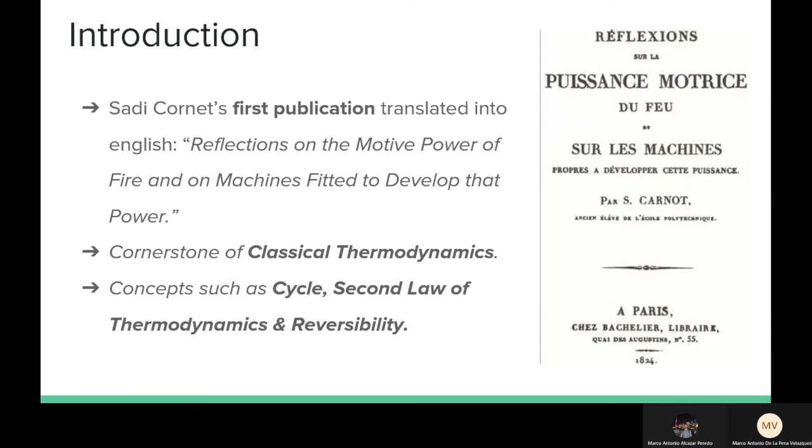Some concepts that are important to know before we start are the Clausius statement, which states that it is impossible to construct a device which operates on a cycle and produces no other effect than the transfer of heat from a cooler body to a hotter body. The Kelvin-Planck statement says that it is impossible to construct a device which operates on a cycle and produces no other effect than the transfer of heat from a single body in order to produce work.

The motive power is an agent that does work in a process; most commonly it is water, steam, or electricity. The main purpose of this paper is to answer the question of whether the motive power of heat, or the efficiency in steam engines, is unbounded or has assignable limits which nature will not allow to pass. So, it is worth mentioning that all substances on our planet are susceptible to changes in volume, pressure, temperature, and this leads to changes in the state of matter.

Now, let's talk about the natural flow of heat. Carnot states that the heat goes from a hot body to a cold body. It cannot be the other way around because it would violate the second law of thermodynamics. And we can also say that according to Carnot, wherever there exists a difference in temperature, motive power can be produced.

So go ahead, please.

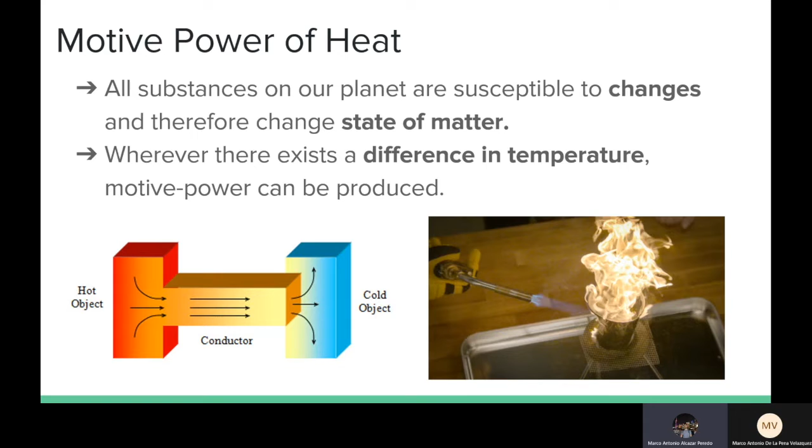Okay, so now let's make a mental experiment. Carnot in his paper says that we should imagine two bodies: body A with a hot temperature and body B with a cold one. We put them in contact, and then we can assure that it's impossible to return to body A the heat employed to raise the temperature of the liquid. But the inverse process, that is to give heat to body A, is permitted. This means that when we put these two bodies into contact, they will reach a thermal equilibrium, and we cannot return to body A the heat employed to raise the temperature of body B.

So go ahead, please. Carnot also mentions two very important theorems. The first theorem is about volume and pressure, on the right side of the slide, and it says: when a gas passes without change of temperature from one definite volume and pressure to another volume and another pressure equally definite, the quantity of caloric or heat absorbed or relinquished is always the same, whatever may be the nature of the gas chosen as subject of the experiment.

I'll give you an example so you can have it more clear. Imagine that you have 1 liter of air at a temperature of 100 degrees Celsius, and a certain amount of heat must be supplied to it. Now we can assure that this quantity of heat will be exactly the same if instead of operating on air, we operate upon nitrogen, hydrogen, carbonic acid gas, alcohol, neon, helium, argon, etc.

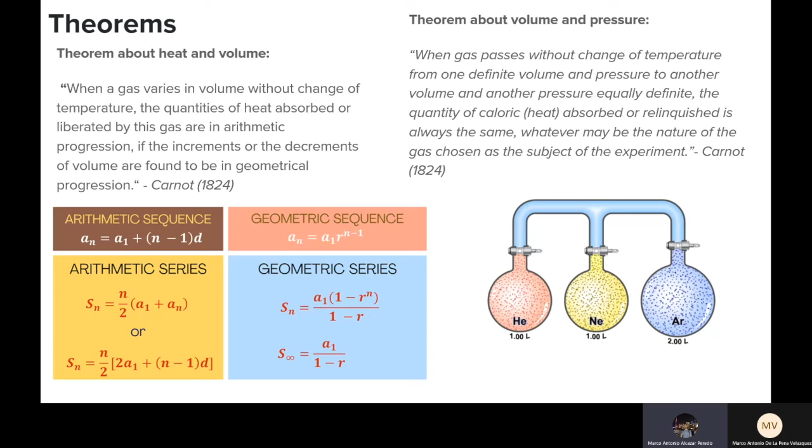Carnot also talks about the conditions to create the most efficient engine. The first condition is that the temperature of the fluid must be as high as possible, so we can obtain a great flow of heat and in consequence a large production of motive power. A second option is that instead of heating the fluid, we must cool down the reservoir as far as we can, and we will obtain the same result. And the third proposition of Carnot is that it should be arranged that the passage of an elastic fluid from the highest to the lowest temperature should be due to an increment in volume.

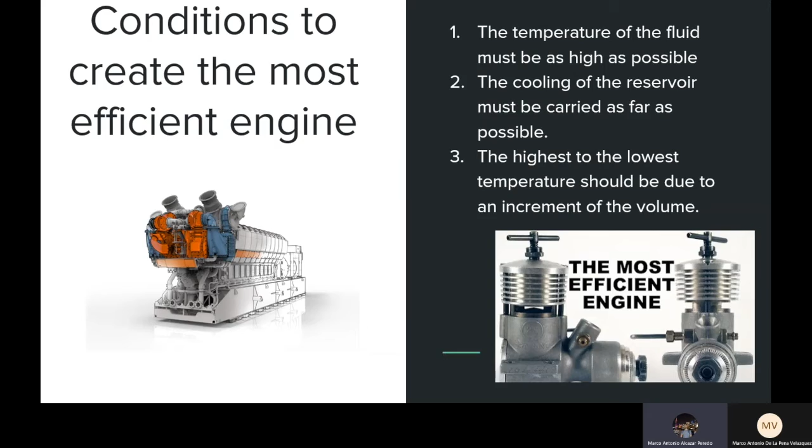Okay, so go ahead. It can be said that high pressure machines are superior to those of low pressure, but this superiority not only lies in making immense pressures, but also it should be a machine capable of varying their pressures, differing greatly from one another.

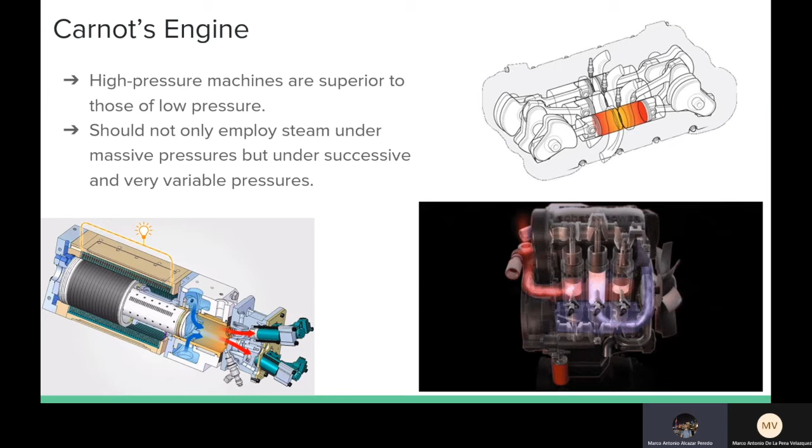So go ahead, please. Finally, I'm going to talk about the Carnot engine that Carnot presents in his paper. Let's imagine we have this cylindrical vessel. We have the initial piston that is in CD, and the piston goes to AB. So it goes to the bottom and then again to CD, and you repeat this process again and again. Now imagine an external force came and made the engine stop at EF.

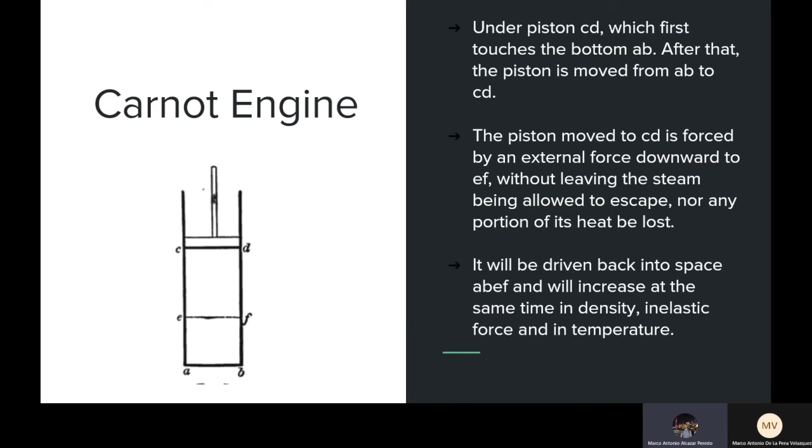Okay, so what's special about leaving this engine at EF? That if we now produce an increment, we go again to CD and EF, CD, EF, we will increase the density, the elastic force, and the temperature in every cycle that you make. But the problem is that this is impossible because the steam would have required for its formation exactly the same amount of heat, but only the heat would have been employed at higher temperature. So the second law of thermodynamics tells us that this engine cannot be realized in reality.

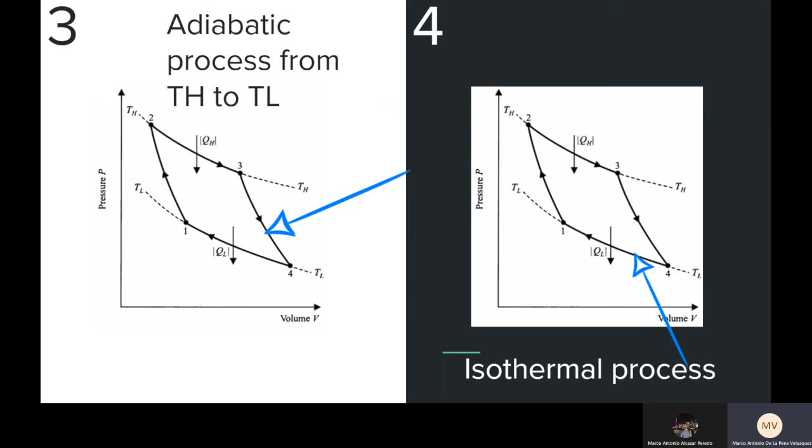Now we are going to be talking about the Carnot cycle. This cycle is divided into 4 steps. The first step is a reversible adiabatic process that turns the lower temperature into a higher temperature. The second step is a reversible isothermal process in which heat is absorbed from the reservoir. The third is an adiabatic process from high temperature to a low temperature, and the fourth is another isothermal process which releases the heat absorbed from before.

Carnot's theorem states that no heat engine operating between two given reservoirs can be more efficient than a Carnot engine operating between the same reservoirs. And here we are going to begin by stating that the efficiency of the Carnot engine is eta R, and the efficiency of the other engine, which is irreversible, is eta I. And so we will begin by saying that eta I is bigger than eta R, and then we will obtain that QH is bigger than Q prime H.

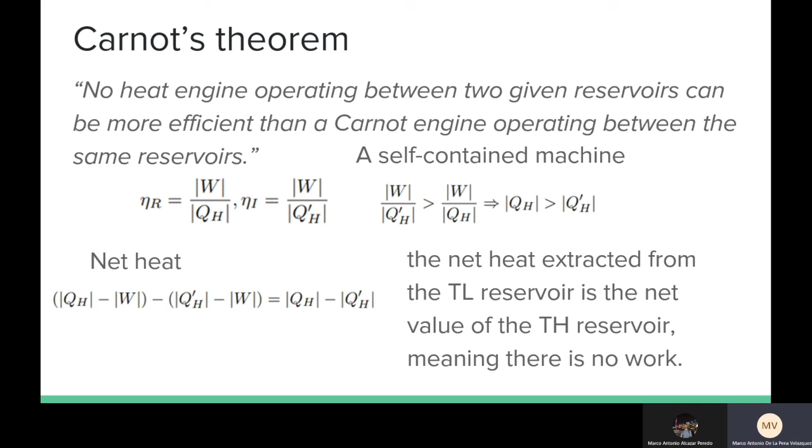So now if we want to obtain the net heat that is extracted from the low temperature, we obtain that it is the difference between these two, the difference between QH minus the work minus Q prime H minus the work, and we obtain that it is QH minus Q prime H. And so we can see that the net heat extracted from the low temperature reservoir is the same as the net value of the high temperature reservoir, meaning that in order for this to happen, there cannot be any work done. So we are left that this is false, and we end this demonstration saying that eta R is bigger or equal to eta I.

And from this theorem comes a corollary, which states that all Carnot engines operating between the same two reservoirs will have the same efficiency. So in this case, it is eta reversible 1 and eta reversible 2. So we will begin by saying that the second one is bigger or equal to the first one, but if we do it the other way around, in the reverse process, we will obtain that eta R2 is lower or equal than eta R1, and so we can end this corollary by saying that eta R1 is equal to eta R2.

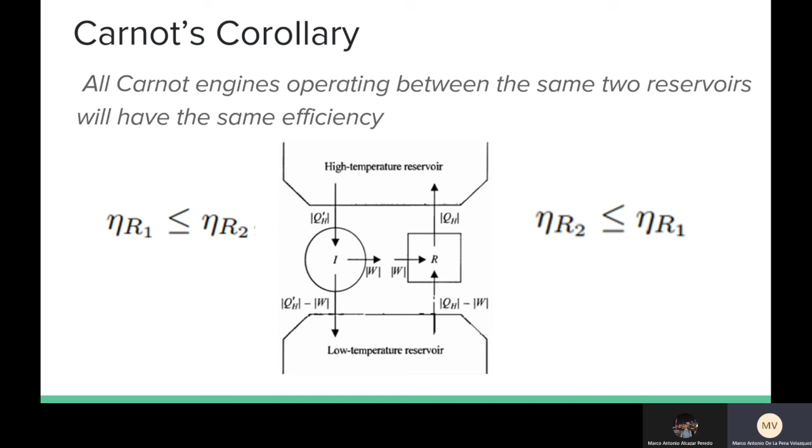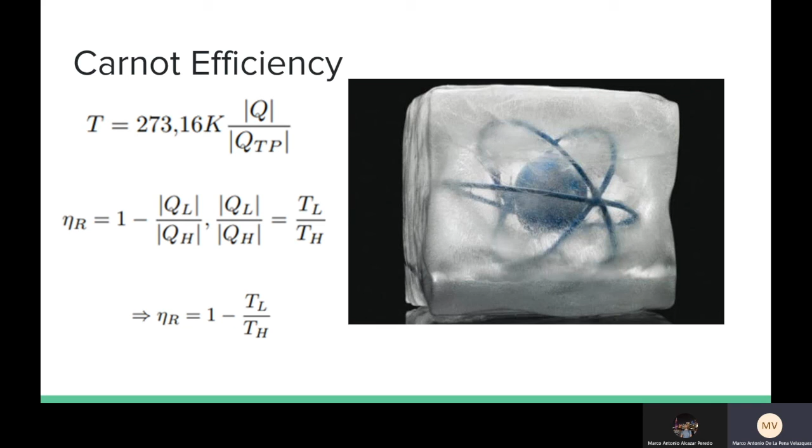The Carnot efficiency, we can describe it as, we know that the temperature can be obtained by this formula, so the efficiency of Carnot will be defined as 1 minus QL divided by QH, but QL over QH is the same as TL over TH. So we obtain that the efficiency of Carnot is defined as 1 minus TL over TH. And in order for this to be the highest value, TL would have to be 0, which is called absolute zero, which is something that cannot happen.

And in conclusion, in Carnot's paper, he talks about very important concepts that are relevant even now, such as cycle, reversibility in a system, the direction of flow of heat, the isothermal processes, the specific heats, and the most important of them all is the Carnot cycle. Last but not least, we can affirm that the Carnot cycle is the most effective cycle among all cycles, but it's only a theoretical one. So we can't actually reach 100% efficiency due to the second law of thermodynamics.